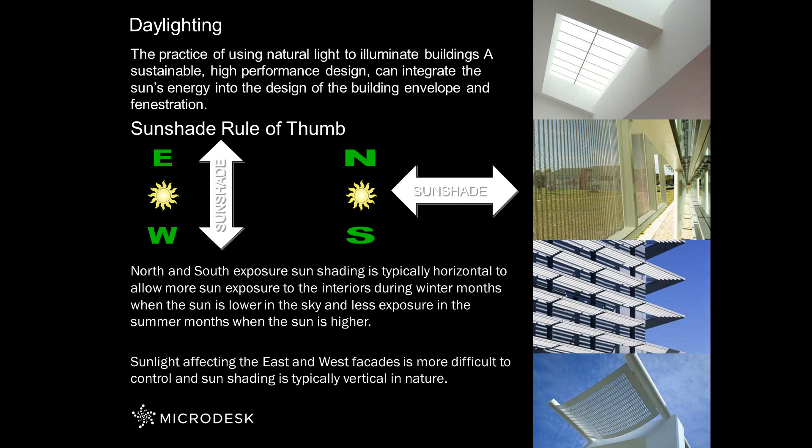That's something that I'll talk about today. So a few things that you can do, and so everybody knows, is that you can go about it two ways in regards to performing sustainable design analysis. And there's quite a bit of simulations that you can do today with several tools. The purpose of this presentation is on Ecotect and how you can use Radiance to go a little bit beyond what you can do with the default application.

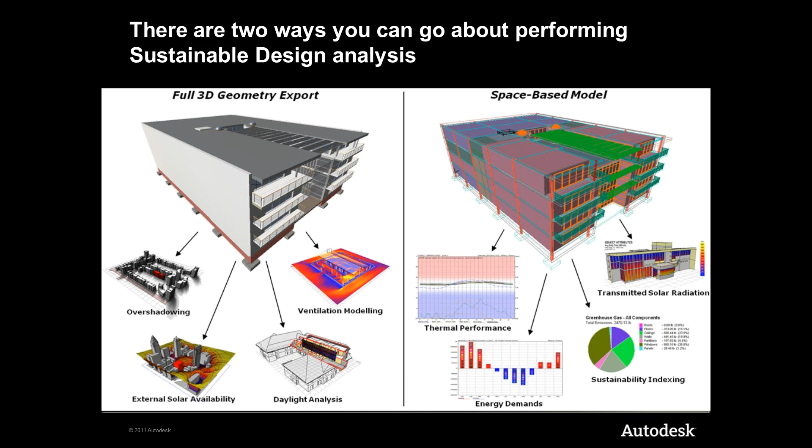So you can go about it with the geometry export from your BIM application, or if you're working with a CAD file, as long as you have some three-dimensional geometry, you could use that even for analysis for daylighting purposes, and I'll mention that in a second. So two ways that you can go about certain analysis is the full 3D geometry, which I'll mention some of the formats, or space-based geometry, which requires a little more information in the model. But whichever you choose, it's good that you know what the capabilities are, and there are some requirements, of course, that you need for specific simulations.

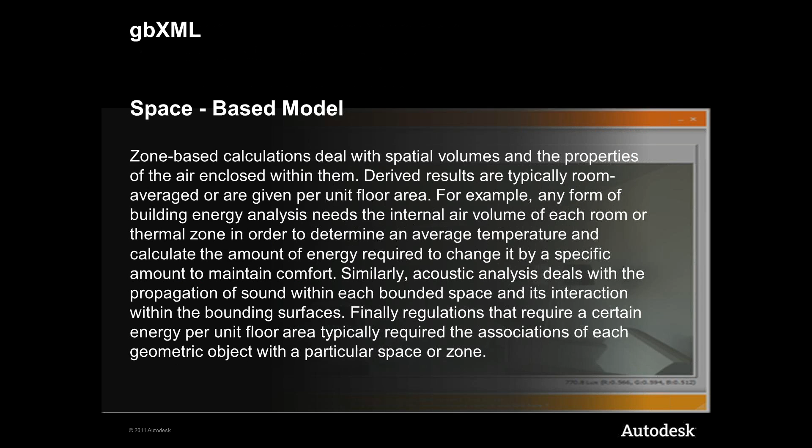But if you're talking about space-based models, the most common format to work with is gbXML, and although it can be used for daylighting, it serves purposes for more advanced simulations like energy demands, transmitted solar radiation, thermal performance, and so forth. gbXML is a schema format that was established a while ago for allowing multiple applications to talk to each other. So if you were using your design tool, how do you get to your analysis tool and retain as much information as you can without the loss of properties and information? That's why that format became very popular, because it allowed somebody designing to bring in the amount of information necessary to be used in the simulation tool.

Now the problem today is that it requires you to understand what properties come from the design program to the analysis tool, and each one is different. So if you're using Ecotect, there's so much information that comes in from a program like Revit, for instance. So it's important that you know what comes in, and for that I would always recommend getting some professional consultant. In regards to what we're talking about today, which is daylighting, you can use the DXF approach, or pretty much any format that produces native 3D geometry. I'm mentioning DXF because it's one of the more popular ones to bring into Ecotect. But you can work with several other formats, like 3DS. This is one of the most common ones.

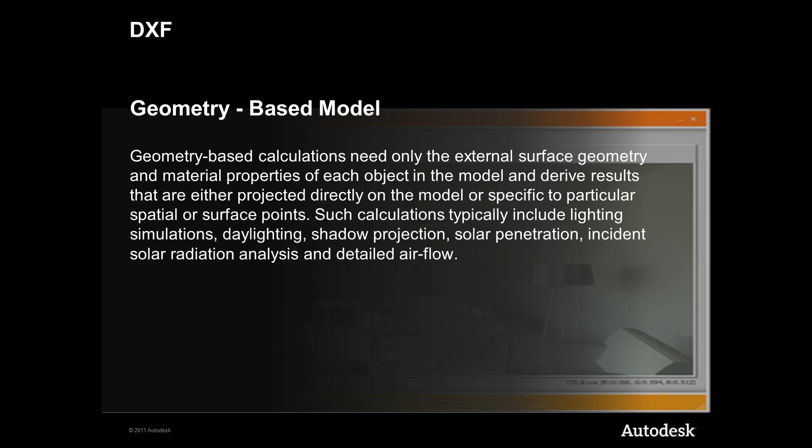But in regards to geometry-based, it allows you to perform certain kinds of analysis that don't require a lot of information in the model, such as shadows and overshadowing, and airflow and ventilation. For those of you who don't know, Ecotect can export to programs that support CFD simulation, and right now Autodesk has a whole set of tools available for people that like to perform computational fluid dynamics simulations, whether ventilation for buildings or recreating how airflow circulates through a particular piece of equipment or manufacturing object. Most commonly for architecture it will be for a building, but Ecotect doesn't perform that on its own. It requires an additional application.

You can also use the DXF format, which is the geometry-based option, for external solar availability. So you can calculate how much sun you have available for certain areas of your building, whether on the inside or the outside. Also, DAYSIM, which is a tool that complements Ecotect and Radiance, serves the purpose of calculating the amount of daylight available in the building. So if you want more control, or more ways to report that kind of information, you can use that tool, and it's also free. And I'll mention how those integrate.

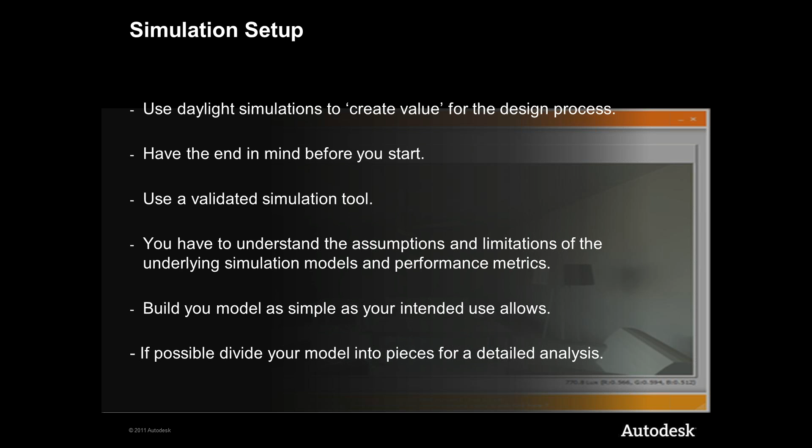So Ecotect analysis and daylighting. On its own, without using Radiance, and I'll explain what Radiance is, Ecotect can go about daylighting analysis several ways. Daylight factor is one of the things that you can do within Ecotect, and it can be done 3 different ways. Point analysis, which is using a perspective camera to see how much lighting value is coming in through those different points that you set up. Also, you can have a point analysis using a sun path projection, so you can see the amount of lighting coming in through the sun path.

And also you can display sun rays, so you can see the amount of lighting coming in and maybe section an area, like probably part of the building where you have blinds, and you can see what happens if you change the rotation of the blinds at a certain time of day to see how much light bounces off the blinds, if it's a shading device projection, for example.

And finally, the most common one, which is a geometric analysis using a grid or sensor points. The grid is one of the options that LEED requirements use. So for LEED, you're required to have a grid that is analyzing all the points a certain distance above the floor on a given time of year, at different times of day. Let's say 3 o'clock, 9 in the morning, and then you can analyze the foot-candle level with a minimum threshold, let's say within 25 and 500 foot-candles. And again, that's something that you can analyze within Ecotect.

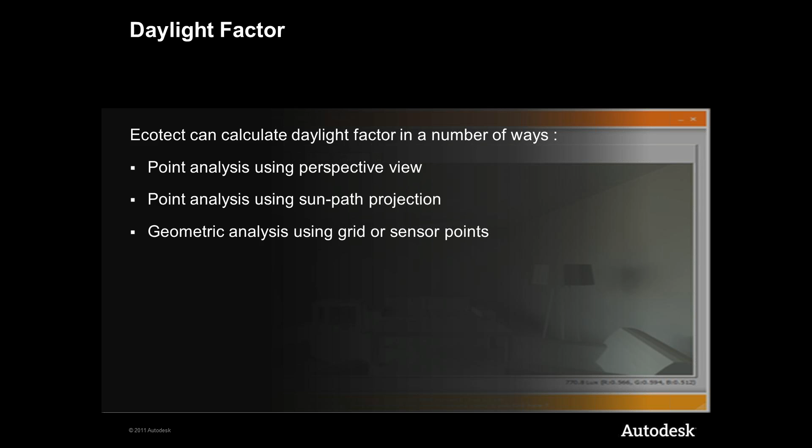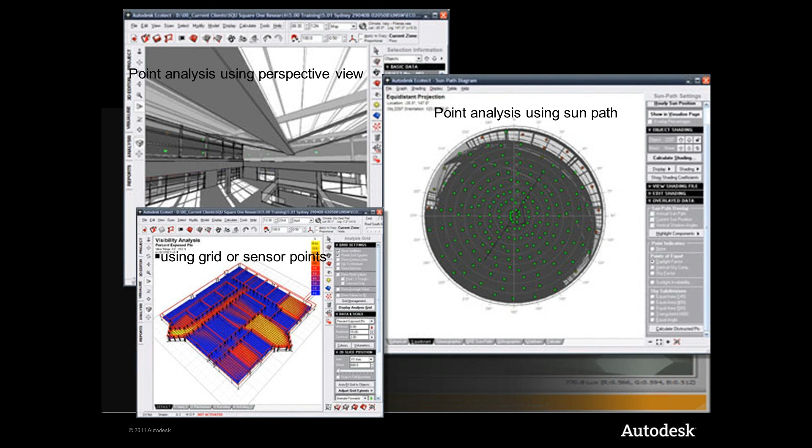So those are 3 different ways that you can approach it. As you can see on this slide, you can see the point analysis using the sun path. You can use the perspective points, which you can define as you're working. And also you can use the grid or sensor points that you can see on the left side of this slide. I'll tell you how you can use it to represent the data in a usable format. Right now it's color-coded, and although it gives you a nice representation of how much light you're getting through certain openings, windows, and so forth, I'll tell you how you can actually interpret that data for purposes of, let's say, LEED certification.

So that being said, there's a few things you should consider in regards to daylight factor. First of all, the type of the reference building, so are you using the grid? Second, the window head or the actual opening, because you're using the amount of lighting coming in through the glass. Another thing that goes hand in hand with that is the glazing type. So if you have a double pane glass window, how much light actually goes through instead of having 3 panes or 4 panes and so forth? And depending on the plan layout, you've got to make sure that the grid is actually enclosing the whole area. So there's several things to take into consideration when you're setting up the grid.

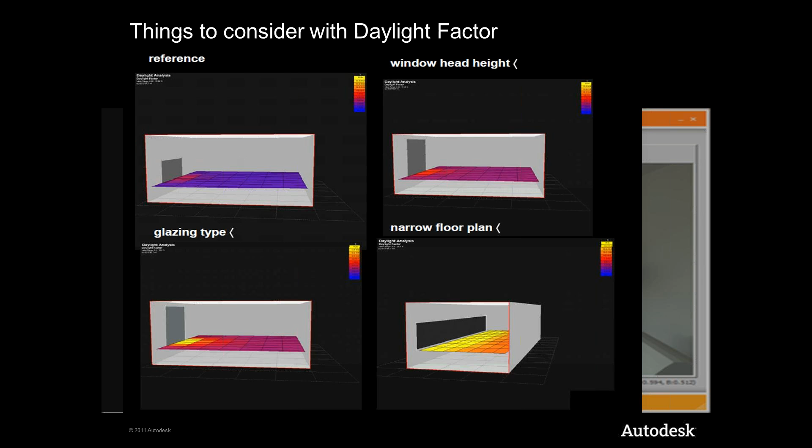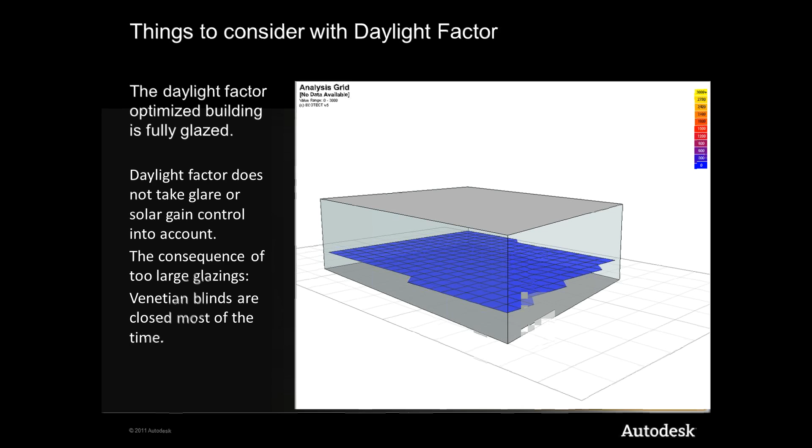And again, when you're doing the daylight factor, you can do the whole thing as a fully glazed value. And although it doesn't take glare and solar gain control into account, you can start testing certain things right there, even if you don't have any walls and windows defined yet. So you can have just corner walls, for instance, or just plain glass, and start performing full glazed analysis if you need to. Now, the other option is the resulting building design form is improved from an energy standpoint, as I mentioned. So you can start testing devices like louvers, light shelves, static shading, and so forth, even vegetation.

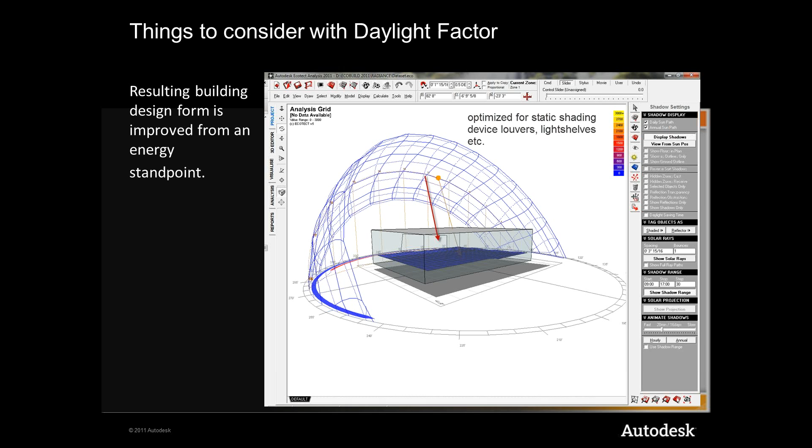If you start putting vegetation at certain locations of your project, you could see that the natural shading can affect the amount of light coming in and so forth.

So if you break it down, what do you need to perform a daylight simulation? First, you need a building model, which can be built within Ecotect, or you can build it on your design tool, like Revit, AutoCAD, or whatever application. You need a sky model, which Ecotect gives you. You need an area of interest, which is the analysis grid, and a simulation algorithm, which is what the software is for. You use the program to perform the simulation based on all these different algorithms and formulas, and based on some performance metrics, you can then use that data.

The building data comes with the geometry, material information, artificial lighting, shading devices, the landscape around it, and any reflectance if it has any. And of course, there are sky conditions, which include the geographical site, data for the time and day, and the sky luminosity. That's all something you define in whichever software you use for designing, or if you want, you can do it all directly in Ecotect.

It's a shame that some people end up recreating the model in Ecotect because they find a lot of problems in the way it translates the geometry. But there are certain best practices you need to follow in order for that to be successful.

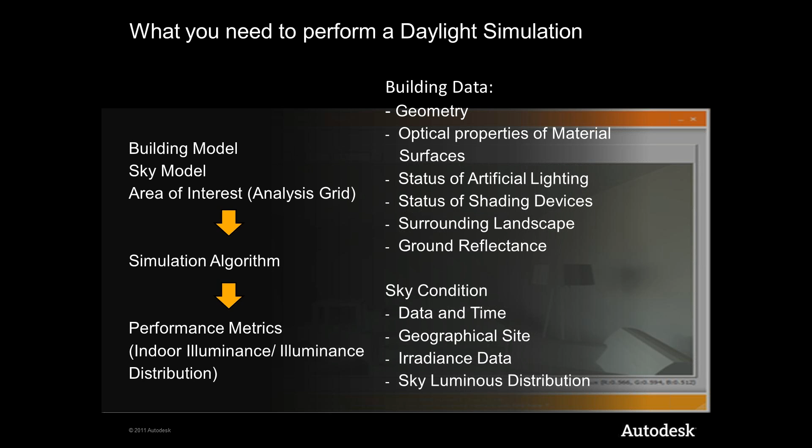Depending on the simulation you're doing, in this case daylighting, make sure you do things in a certain way. The problem is there isn't a lot of white papers or information that tells you what the steps are. I'll tell you some of the things in just a minute.

But there are certain things that are pretty generic, like always model your model as if it would be built. Never leave gaps in the geometry. Make sure the model is airtight so no light is getting out of the areas. Also make sure the model is not over-modeled. There are little things you see as generic best practices for maintaining model size, but a lot of them actually apply to generating a model for analysis, in this case for daylighting.

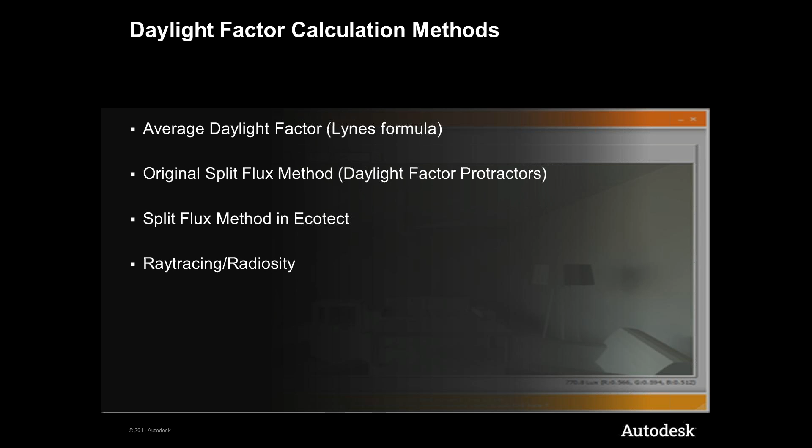So how does Ecotect perform the daylight factor calculations? Well, there are four methods. There's the average daylight factor using a formula by Lynes. There's the original split flux method, which uses a protractor, which I'll show you in a minute. There's the split flux method default in Ecotect, and ray tracing and radiosity with Radiance, and I'll mention those in just a moment.

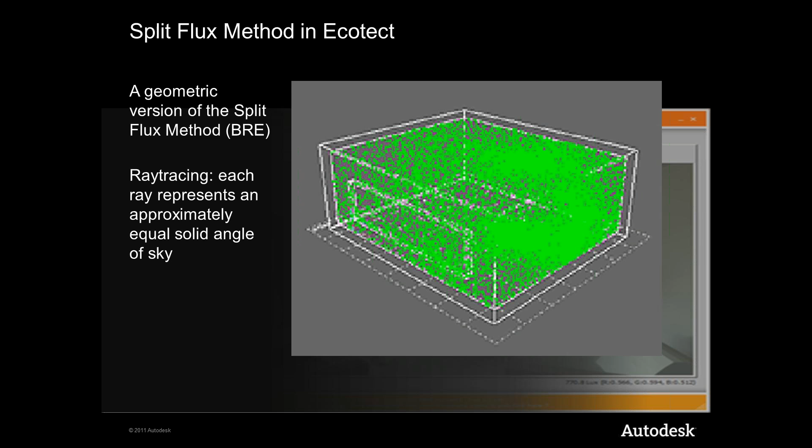What do all these concepts represent? For the split flux method, which is default in Ecotect, this is a method that represents points, pretty much rays that are approximately equal solid angles of sky, and how much of those are getting into your room based on the opening that you have. The thing about this is that it's not approved by LEED, so it's good for analysis you just want to test. If you don't use Radiance, you can use it to see comparison values, like what happens if you alternate the angle of the sunshade device, or the opening width of the window, and so forth.

There's a lot of things you may not really need to know in regards to how things are calculated, but just so you know, these methods are available through wizards. When I say wizards, they're usually available as a simulation option on the menu, where you can say, I want to do a lighting analysis, daylight factor, and it will continue to ask you questions. It usually requires you to set up a zone path or a grid if you need to.

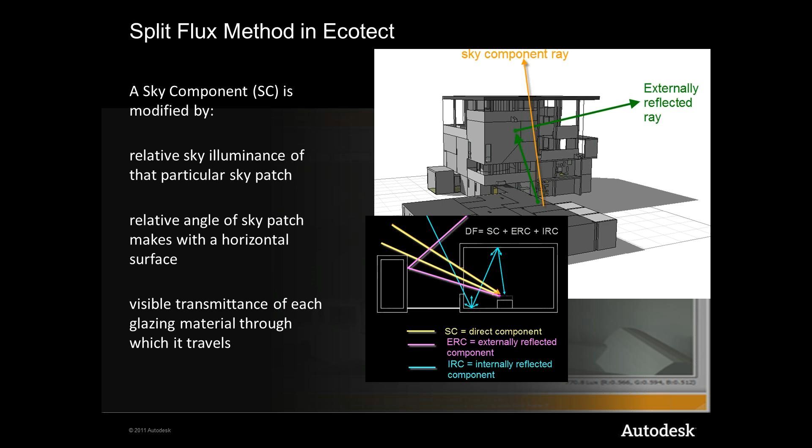Again, these are just different methods that are available. This one, for example, takes into consideration the luminance of the sky, reflectance of the material, relative surface angles, and glazing transmittance. A lot of that stuff can be preset in Ecotect in regards to material libraries that have a certain amount of transparency, reflectance, and so forth.

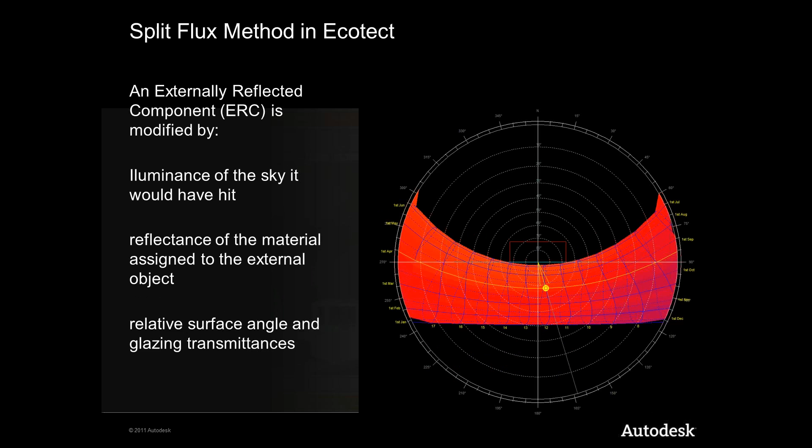One thing that you should know is limitations. To be compliant, Ecotect cannot consider multiple reflections, so it underestimates indirect daylight.

You may see that there are certain areas where the light is off, and if you need multiple surfaces to illuminate a space, that's why it actually works well with Radiance, which takes advantage of the whole model and how everything is set up, giving you a radiosity method to calculate this information.

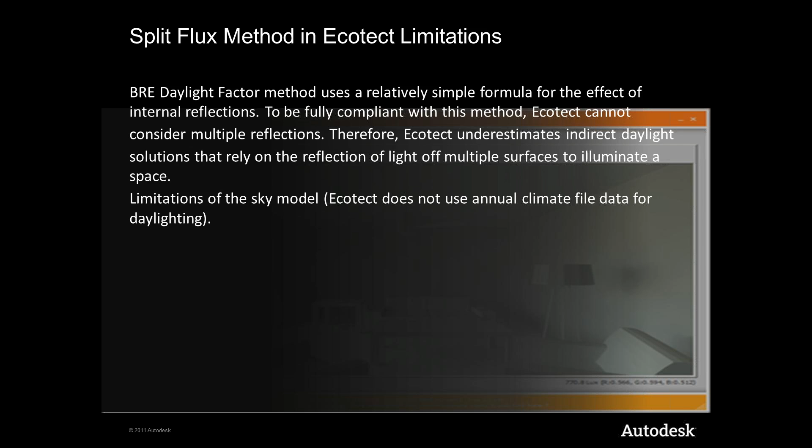Anyway, the split flux method requires the design values. This represents the design sky values, horizontal, that exist 85% of the time between the hours of 9 and 5 through working years. It really represents a worst case scenario you can design to, being sure your building will meet the desired light levels at least 85% of the time.

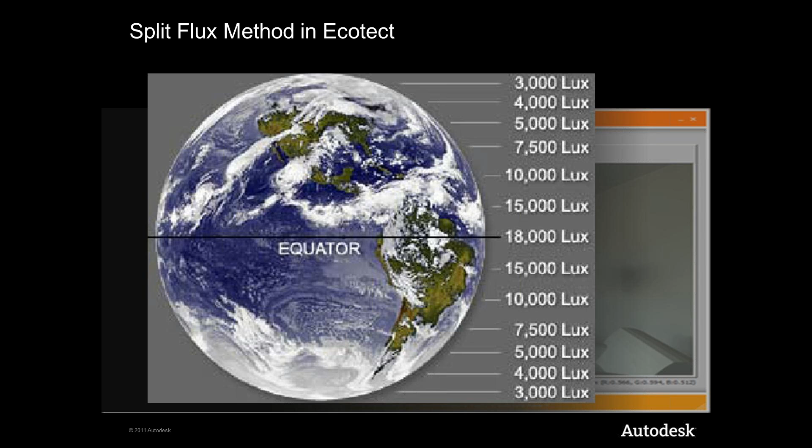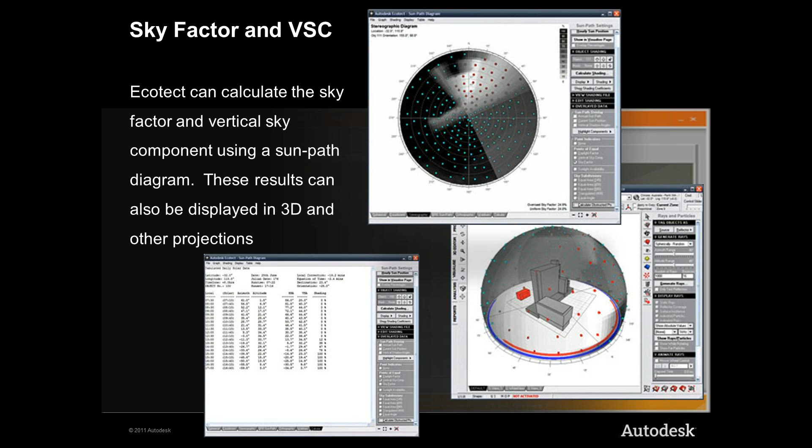So again, this is one of the methods. It's not really the most common one. The most common one uses the grid for interpretation. But other ones are the sky factor and VSC, which can calculate the sky factor and vertical sky component using the sun path diagram and points, where you can define anywhere on the space how much light levels you have inside any room. So it's very interesting.

Now, in regards to materials, I mentioned that it's important to have geometry and the right material assignment, especially if you have window glazing of a certain type. The good thing is that Ecotect has a library, and that library can be easily customized.

So what you could do is, by default, if you translate from, let's say, Revit into Ecotect, some of the things are going to be mapped automatically. A wall will know that it's a wall, a door will know that it's a door, but the values per se are not going to come in. So once you define the windows, you can select them all, or by window orientation, and then select the type of window or the type of wall that you want.

One thing that I find very cool is in the material library, on the top left, you can highlight the information that is specific and critical to be filled out for a simulation. For instance, for lighting analysis, as soon as you select only show me parameters relevant to lighting analysis, you'll see they highlight in pink. That's very cool, because you can do other kinds of analysis and not worry about certain parameters you don't care about without having the expertise.

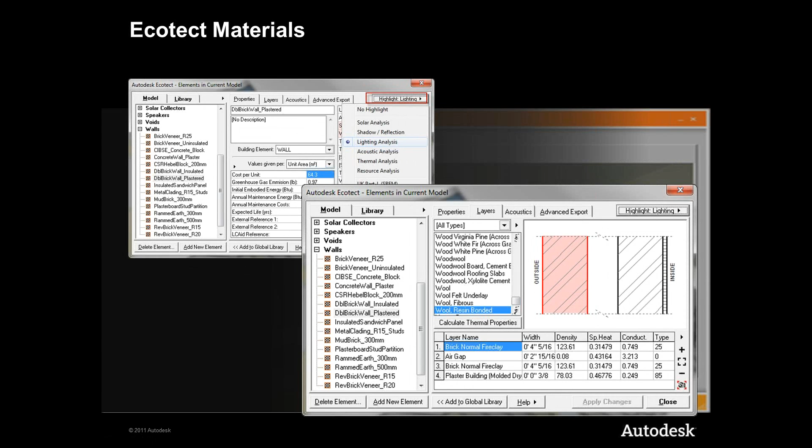So just make sure that you have those values properly set up so they're a realistic representation, and then you can get a more accurate result at the end.

Anyway, now that we get to the default process within Ecotect, why would you use Radiance, where can you get it, and how much does it cost? Well, first of all, when you look online for Radiance, you're going to see two things.

You'll see two versions: Desktop Radiance and one called Radiance on its own. Desktop Radiance is the one that you want, and it includes libraries of materials, glazings, and so forth, and it works well with programs like Ecotect. It actually runs within Ecotect as an engine, and you don't even see anything processed. It has its own interface for viewing the results, but it's kind of running within the program, and it can interpret the information in Ecotect.

Also, it's free. It was developed by the Berkeley Laboratories in California, and it's still free, accessible by all. It's the latest version—I think it was 10 years ago—but that means it hasn't changed because it works the way it's supposed to.

Another thing you should know is that if you ever run into the one called Radiance, that one is a suite of programs that run on a Unix software. So there are two different things you'll run into if you Google it. Make sure you got Desktop Radiance, which is the one that works integrated with your AutoCAD software and also with Ecotect.

So again, Desktop Radiance is the one you want, and Ecotect in this case serves as a visualization platform for that data generated by Radiance. It can be used to see the results in Ecotect on a grid, for instance, to calculate the amount of square footage being applied, the amount of daylighting—I'll show you in just a second.

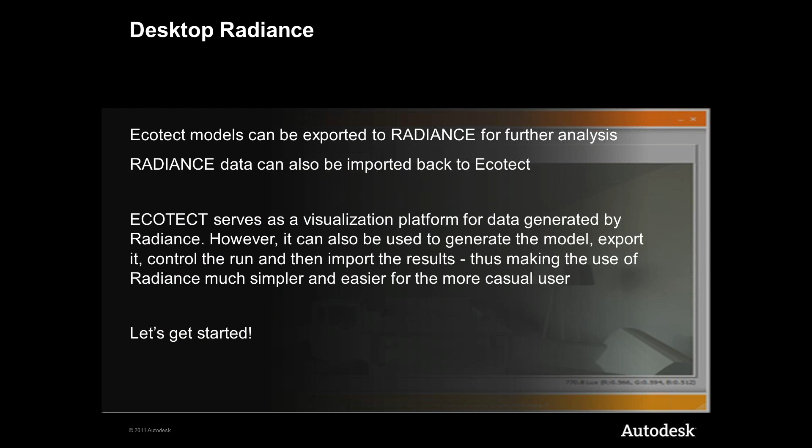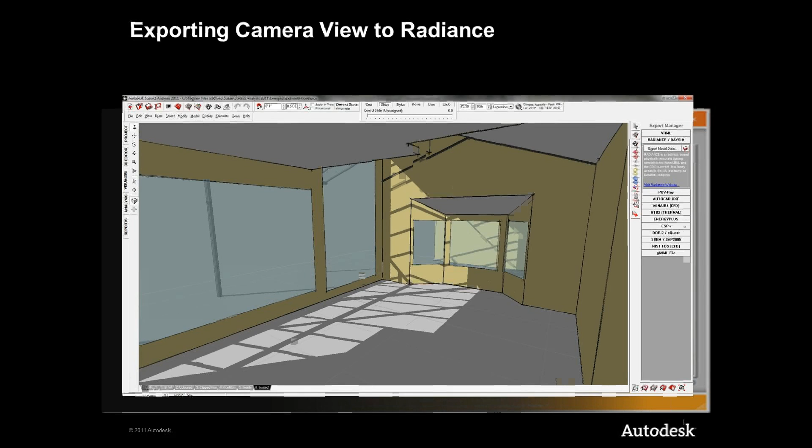Once that's set up, you go through a 9-step Ecotect wizard. Pretty easy—you just go to a menu called Run Analysis, and there you'll see one for lighting analysis. Once you're in the lighting analysis option, it will give you the option to run it within Ecotect or export it to Radiance for more detailed analysis.

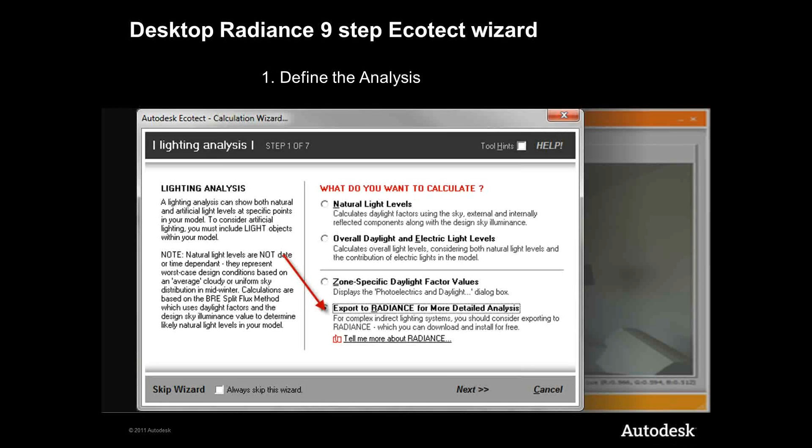So if you have anything more complex or want something more accurate, you want to go with the Radiance option. I'll tell you what you need in order to do that.

The second thing is that if you go through the wizard and hit next, it asks how you want the presentation of the results. A lot of times you want to generate the images in Radiance, but you also can calculate values for objects or grid points, then load them back into Ecotect, creating like a spreadsheet you can later reuse.

It gives you different options to interpret the information. You can also open the Radiance control panel, which is its own user interface. It's not complex, but I'll show you how it looks—it looks pretty intimidating, but it's really not that complex.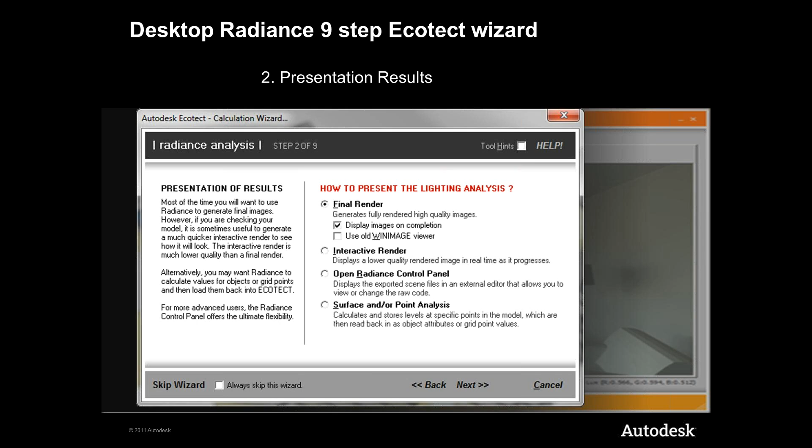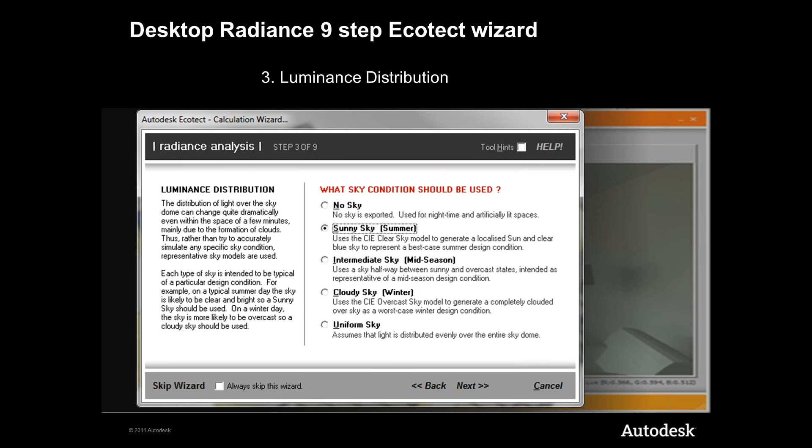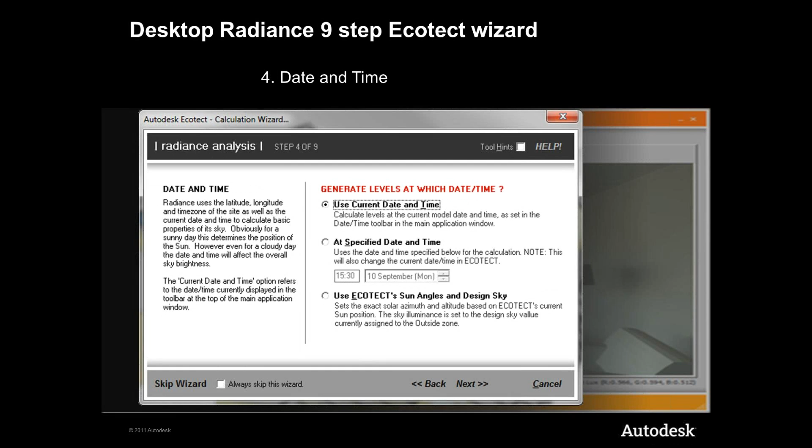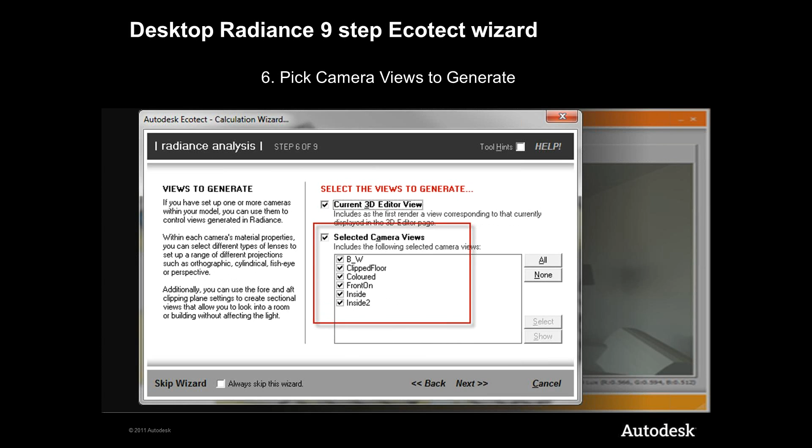The more accurate you go, beyond medium, you're going to see that it's going to take a little bit more to process. So it depends on your computer and how much time you have to generate the results. Usually they're pretty fast, depending on the building, of course. That's why sometimes it's good to subdivide your model to analyze it in several areas, in separate pieces.

So a good workflow in that case, when you have a very large project, is to section it in quadrants and then bring those pieces into Ecotect as either a gbXML or a DXF, and then analyze those areas and then compile the data at the end. So it won't take forever to process any calculation, and you make things achievable on time.

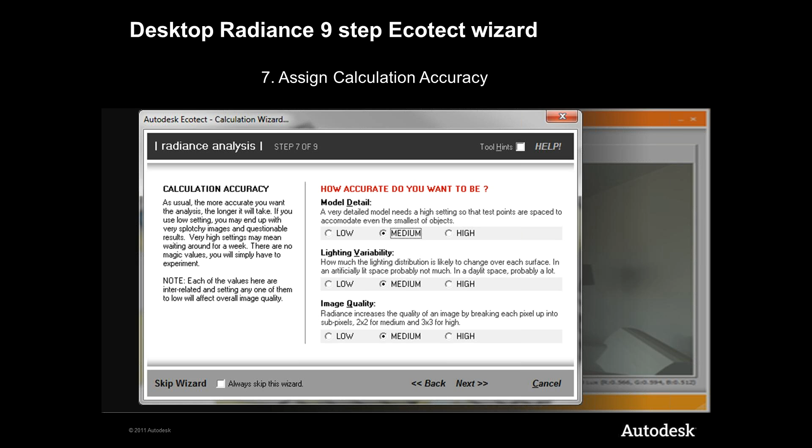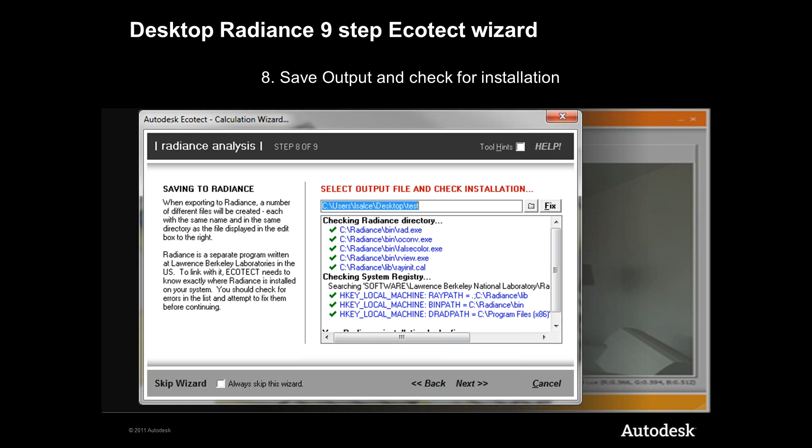Anyway, in the end, what it's going to ask you is to save it as a Radiance output, and it actually asks you for the Radiance installation. You're going to see everything looking green, as you see here, check marks, when everything is installed properly. Now, if you don't see it, which is probably going to happen if you don't have it installed or installed it wrong, then the first thing I recommend is on this website right here, you'll find the actual Desktop Radiance.

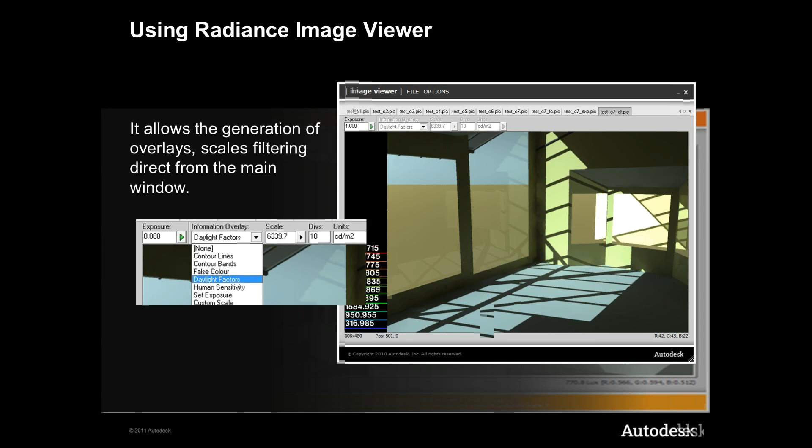So these are other representations that you can see in regards to pseudo color, lux level based on dots, and those dots are representing different areas that you click on.

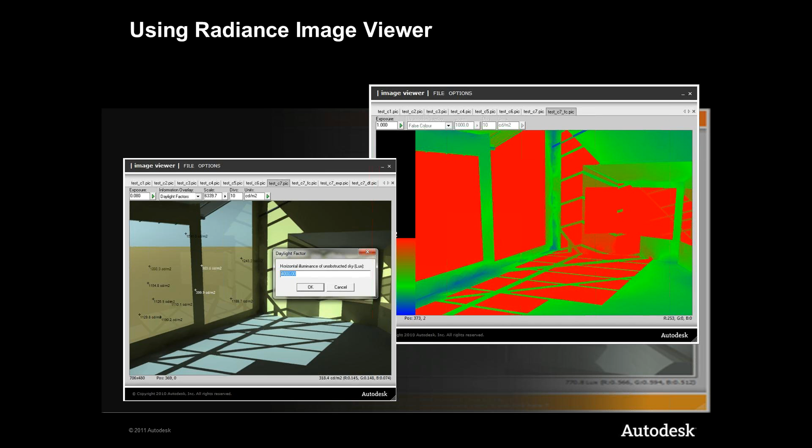So this is pretty cool because you can actually click on the image itself, and as you're clicking, it will just demonstrate the amount of foot candle level that is coming in that particular area of your image. So very interactive and easy to represent.

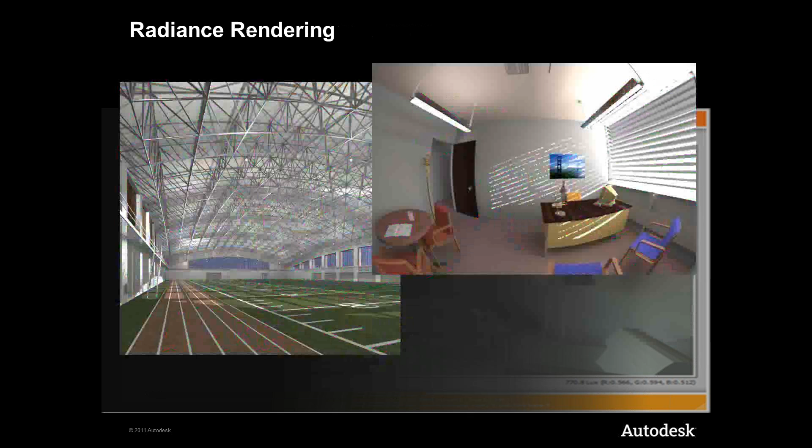So overall, it's going to provide you with close to real representation as a rendering. So you can use this, I wouldn't say it's a visualization tool, but it will give you a very close to accurate representation for lighting studies. I know quite a few lighting designers and manufacturers that use Ecotect and Radiance to present and test their information in the IES

data within the lighting fixture, artificial light, and see how much light is actually needed in a room, and if changing a particular light fixture to another one is going to make a difference in terms of less lighting or more to fill the space. So it can be used even for that kind of purpose, to visually see an accurate representation of how light will be. But it's more on the interior lighting representation. I just wanted to mention it because it's something it is capable of doing.

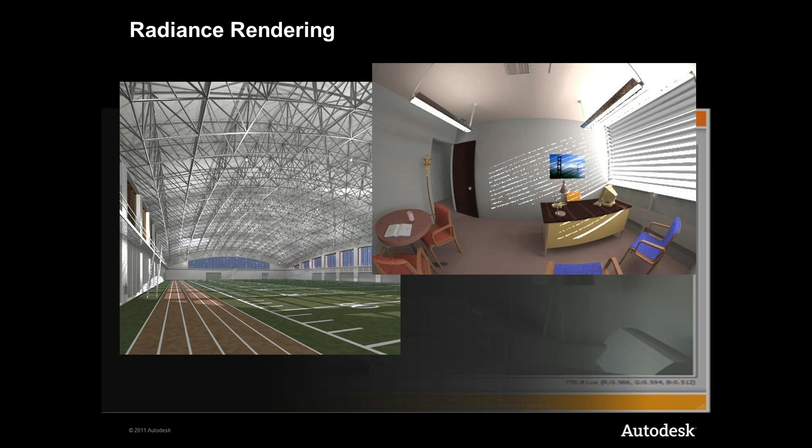Radiance has an engine that produces a physical rendering. If you want to, you can open the Radiance control panel, which is more command line based. So you can type in a lot of information. You can preset properties on different palettes, and it's very user friendly. It's not as pretty as far as the way that you can visualize things in Ecotect, but you can change a lot of things the way you change properties in Revit or in AutoCAD as far as filling out the different parameters.

Since we're running out of time, how do you use this data in Ecotect for real practical use? Well, first of all, the data from the analysis can now be displayed in Ecotect. The 3D volume can be displayed by setting upper and lower thresholds, and I'll show you in just a second how that looks. You can now interrogate the 3D volume by slicing any location in different axes, so you can see how much light there is by doing a kind of 3D section.

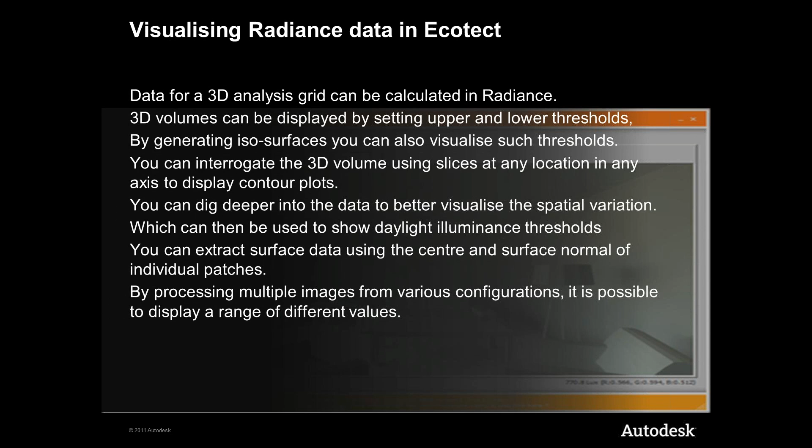You can extract surface data using the center and surface normal of different patches, and you can process multiple images so you can view a range of different values. What does that mean? Well, this is what I mean. You can split your image and view it as a volume and visualize it in a legend where you can see the amount of light coming in. It's a more visual representation. It gives you a better idea.

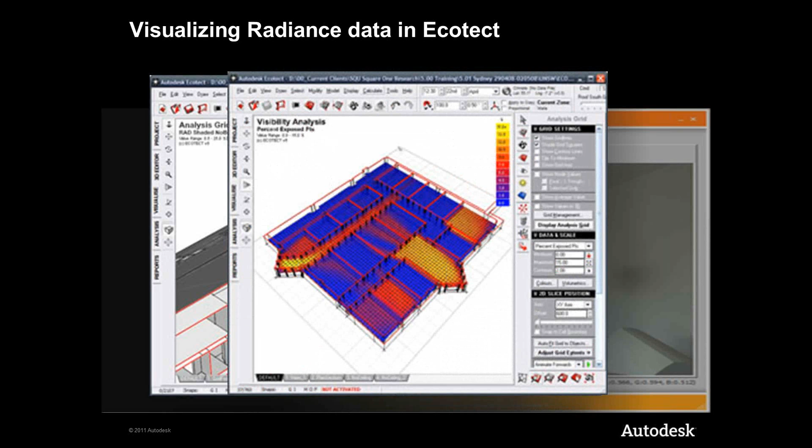Also, you can see it in a grid or visibility analysis where you can see the percentage of daylight or the foot candle level, lux, depending on the units that you use for calculation. And finally, you can see it on a broader area. So you could see, on the urban side, how much lighting is available across that whole spectrum. So this is now using the data for real representation.

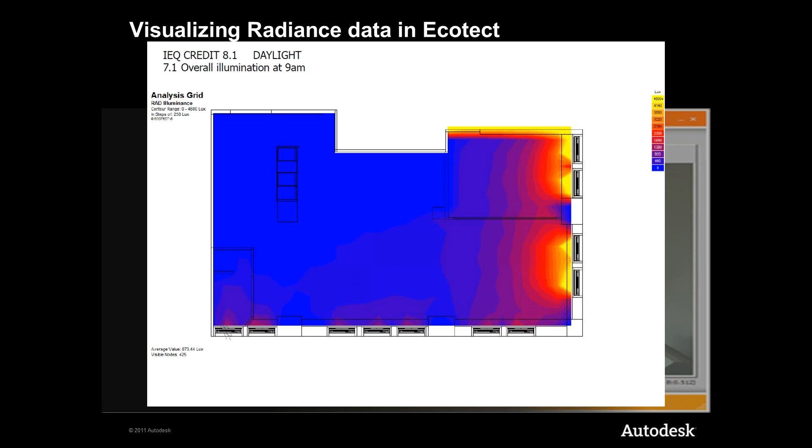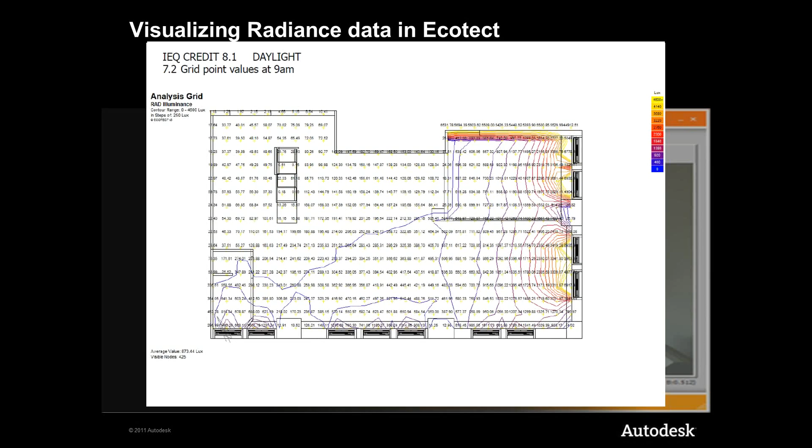With Radiance, you can see the lux representation in contours. Those contours are telling you the threshold between a particular lighting value and another lighting value, like the LEED requirement that says 25 to 500 in an occupied area. Well, what do you do with this? You export it as a Windows metafile within Ecotect, and that allows you to open it as a vector object in programs like Revit or AutoCAD, where you can now easily generate square footage.

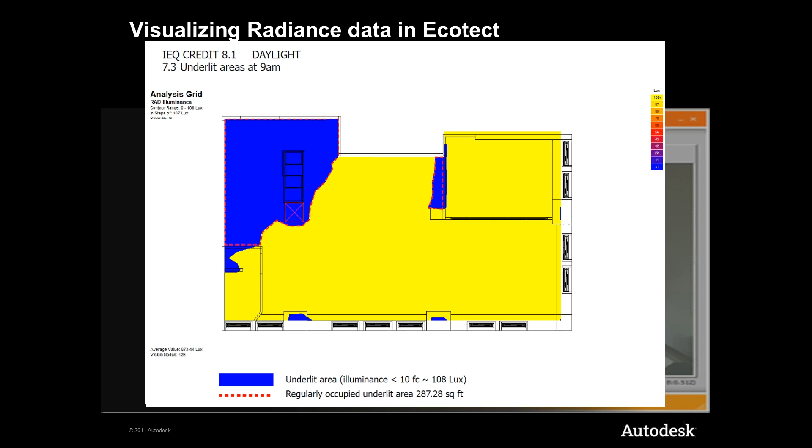So it means that now you can hatch it pretty much, and then based on the hatching, you can see the range of illuminance and the regularly occupied area, and then kind of create your own legend in color, and then you can generate a report. And although it's not just a simple you fail, you pass, it's actually accurate, and it can be used for submittals if you want to for LEED daylighting credits.

I know that this method has been used by a couple of consultants that I know, and it's actually very creative and it's proven that it works. And like I said, it's something that you can validate. Radiance is a validated tool. There's white papers on it, so you can show kind of what happens behind the scenes.

But in the end, what you do is it kind of requires the reverse engineering, where you get the output and then you bring it back into your design tool, and then you manually just hatch it. And then, as simple as that sounds, that way you can now find out what is the total square footage overall of occupied areas that have access to daylight meeting a particular threshold.

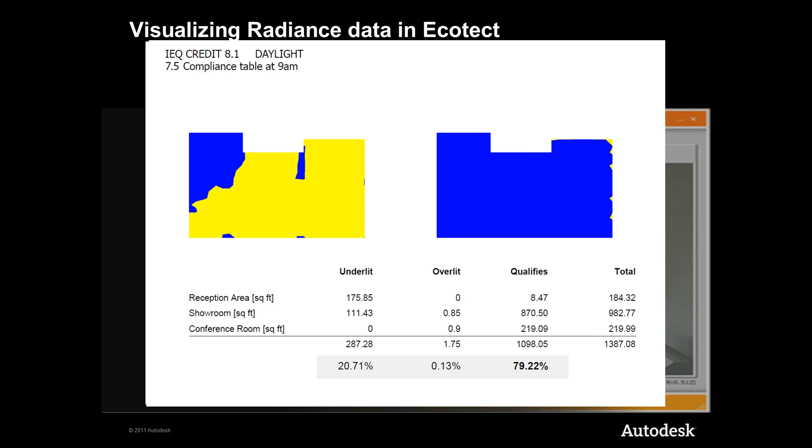Based on that, you see that if 90% of all your rooms meet that requirement for LEED 8.1, you pass. So beyond 90, you pass. Below 90, you fail. So right now, you see an example here, 79.22%. That means that doesn't meet the requirement for the amount of daylight available for that occupied area.

So pretty much in the end, what I want you to take away from this presentation is that Ecotect has its own tool, can perform this kind of daylight simulation, and is a very intuitive and easy to learn tool, and it works very well with your design package. But then, in order for you to make it more accurate in the way that it interprets the results and the way that you can actually validate it and prove it, is to use programs that are defined for that, to take advantage of certain particular areas that Ecotect doesn't take into consideration. So Ecotect in this case serves as a visualization platform for data generated by Radiance.

However, it can also be used to generate the model, export it, control the run, then import the results, thus making the use of Radiance much simpler and easier for the more casual user. Combined with the free Radiance control panel and the Radiance image viewer, which I showed you, it pretty much provides a complete development environment where you can start testing things.